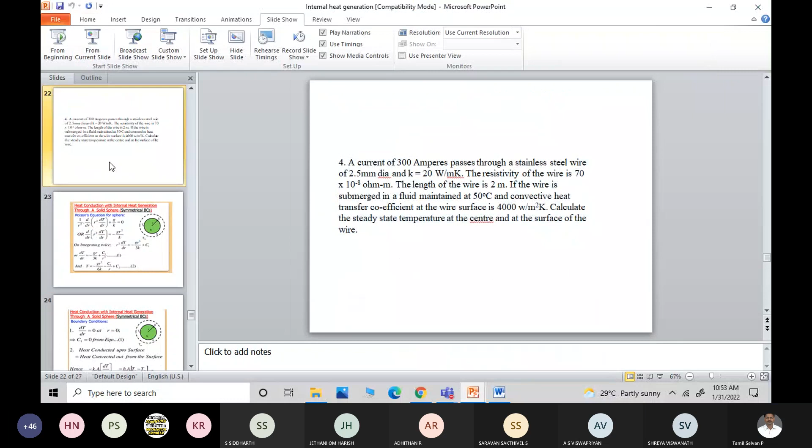Hello, am I audible? Yes, sir. Okay, up to what step did we do the problem on the previous day? Up to which step, man? What are the things we found out? Surface temperature, I think we have found out, am I correct? All of you are there or not? Sir, I guess we have to find T naught, sir. I guess we are yet to find T naught, sir.

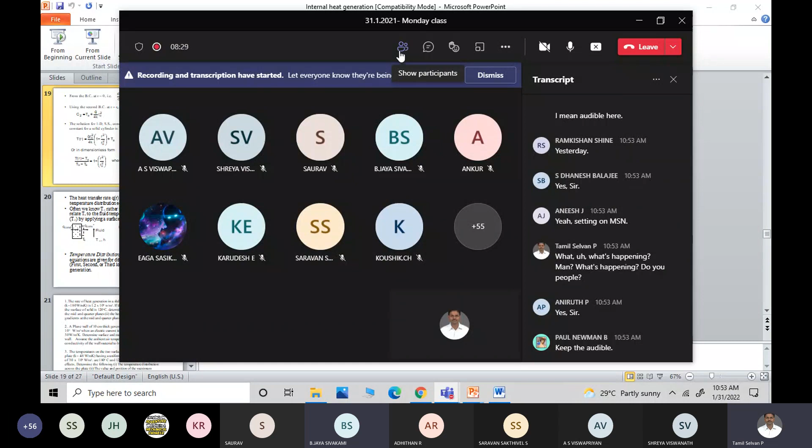Surface temperature, center temperature, right? Yes, sir, surface temperature, did we find out? Hello? Am I audible here? Yes, sir. What's happening, man? What's happening to you people? What's happening there? All of you are there or not? Kindly open your webcams, I want to see you, man.

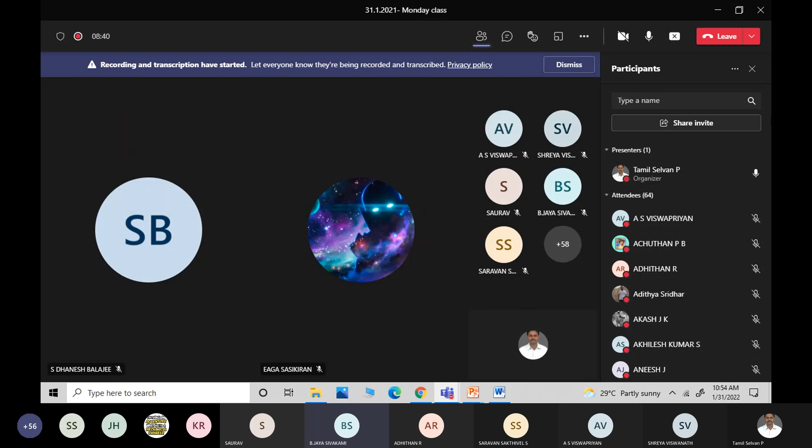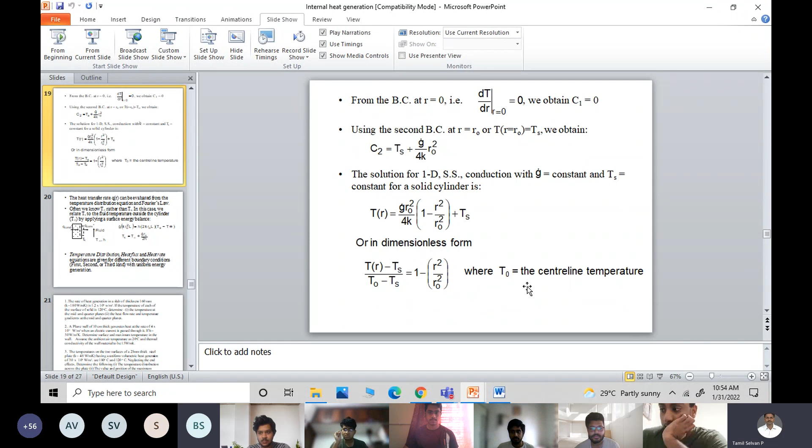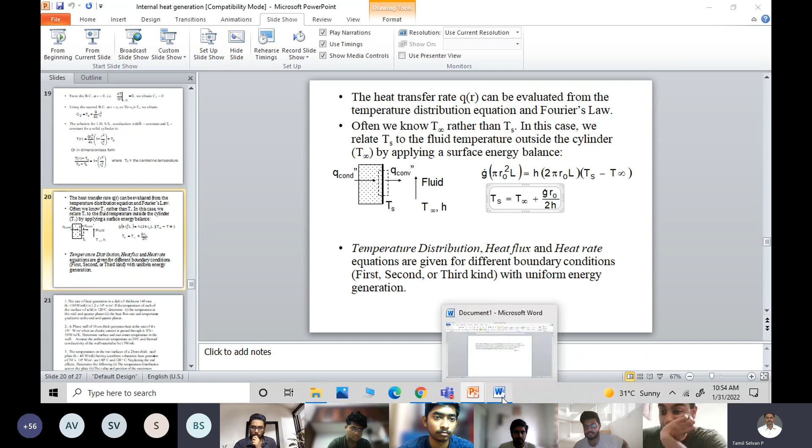See, it's ridiculous, only one step I asked you to do and you didn't do it. T naught is the center line temperature, the center temperature, which you are supposed to find out, right? You didn't do it. Surface temperature, have we found out? What is the value we got? Hey, all of you have got the problem with you or not? Sir, wasn't it 63.33 the surface temperature? We found it on the previous day, right?

Yeah, you can close your webcams. We have found the surface temperature on the previous day, right? Yes, sir, wasn't it 63.33? Okay, then why are you people struggling? Did you have a notebook with you or not? Calculators, notebook.

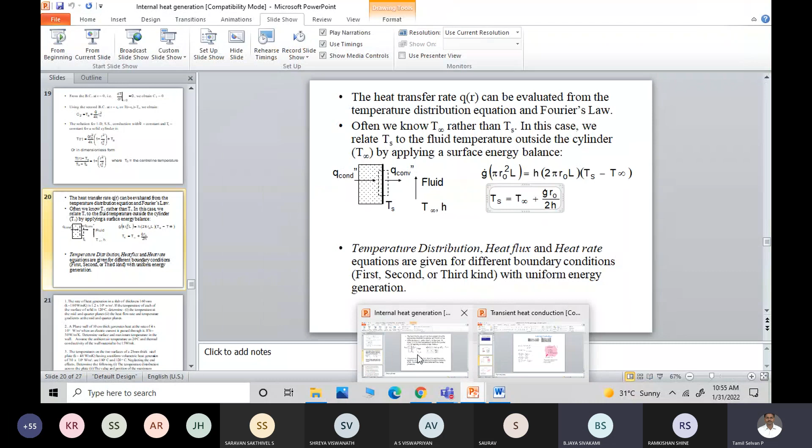Now you are expected to find out the center temperature, right? So how to get the center temperature? I have already told you, you can use this expression to get the center temperature. Now we know that at r equal to 0, dT by dr at r equal to 0 equals 0. So what happens here is the temperature at the center, T naught, the center line temperature. We can use this expression to get T naught, or we can use the general expression. Central line temperature.

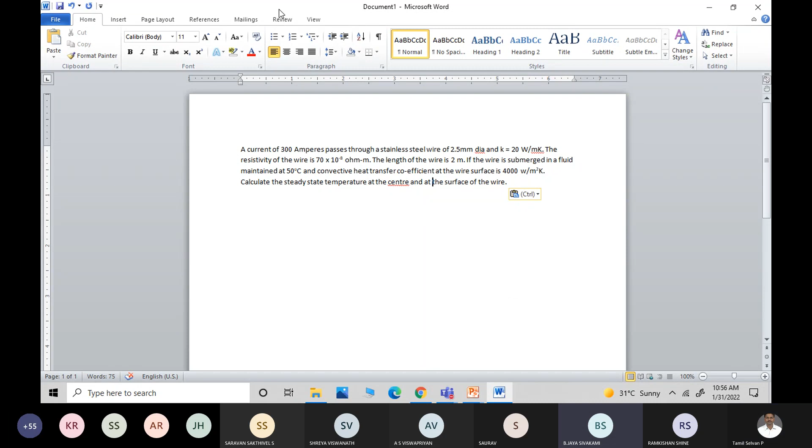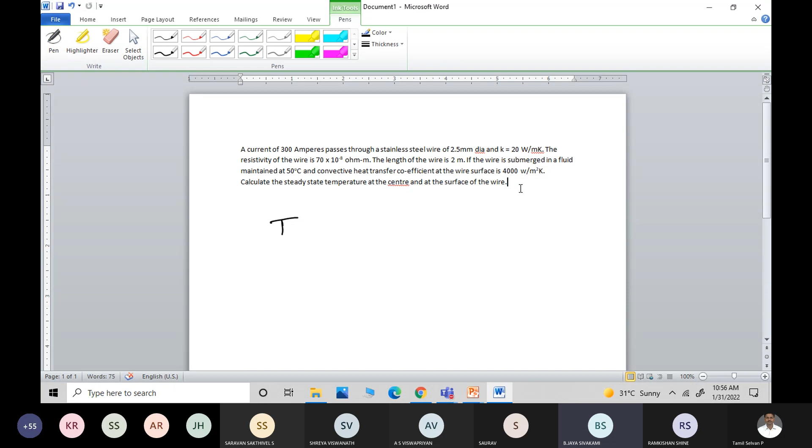Is it visible to you? Yes, sir. So this is the expression. Is it visible? Yes, sir. Now, since R is equal to 0, this term becomes 0.

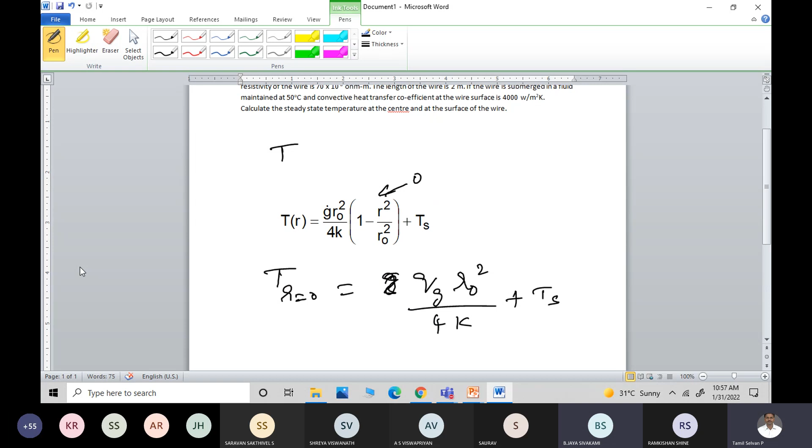So what happens here is temperature at R equal to 0 is QG times R naught square, divided by 4K, plus surface temperature. R naught is the outer radius. So the QG value, the internal heat generated value, what value did we get for QG on the previous day? 2.6 into 10 to the power 9 watts.

And the outer radius, what is the outer radius? The outer radius is from the diameter of the wire given, radius 2.5 mm diameter, so the radius is 1.25 mm. So now substitute: T naught equals 2.6 into 10 power 9 divided by, into R naught square, 1.25 mm.

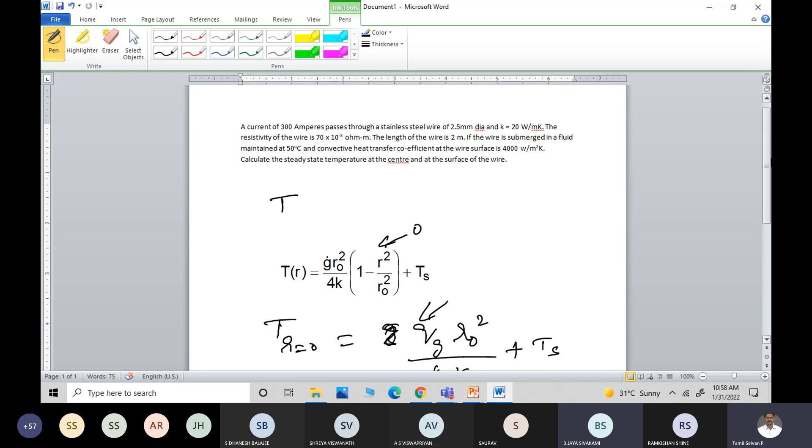All of you are listening or not? Yes, sir. Students, do you find any difficulty in substituting the values and getting the result? Any problem for you? Why did none of you do it? Why do you want me to do all the problems? If this being the case, you will not be able to get good marks in the CAT exam as well as the FAT exam, please understand that.

And what is the surface temperature value? 63.33, sir. Okay, now what is the central line temperature?

What is the value, pa? I'm getting 114.08. Yes, sir, that's what I'm getting. Others, please check. Sir, I got 114.11. Same, sir, same.

What is the wall temperature you got? All of you, surface temperature? Sir, surface temperature is 456.25, sir.

Not 63, I guess. What are you doing? Sorry sir, confused with the previous problem. Someone said it wrong, sir. Surface temperature is 456.25, sir.

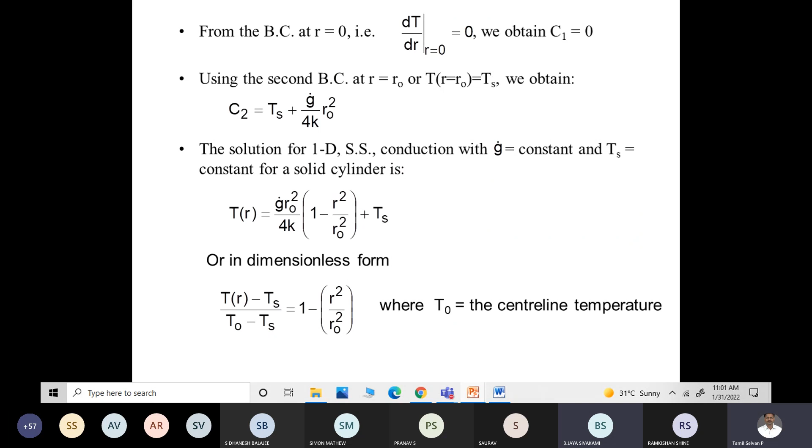So this is something about the cylinders. In the previous cases, we have solved problems with composite wall, cylinder, and sphere, right? Similarly here we solved problems with slab generation - internal heat generation in a slab, internal heat generation in a cylinder, and finally internal heat generation in a sphere.

The outer radius is given by capital R, and smaller r is nothing but radius at any point, from R equal to 0 to R equal to capital R. Is it fine, students? Is it visible? Yes sir, yes sir, yes sir.

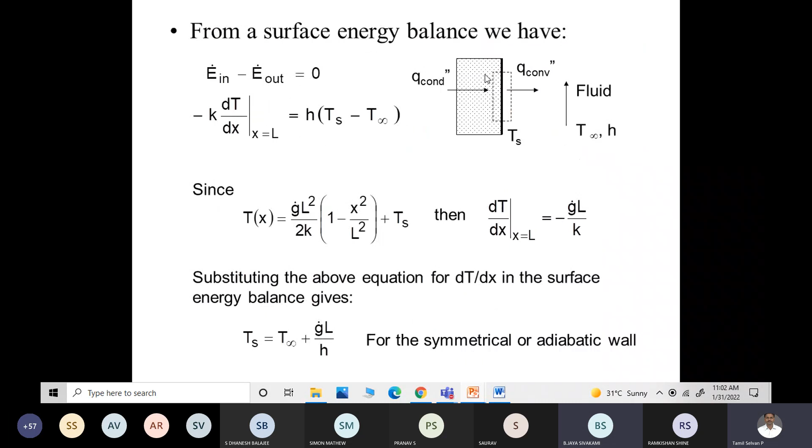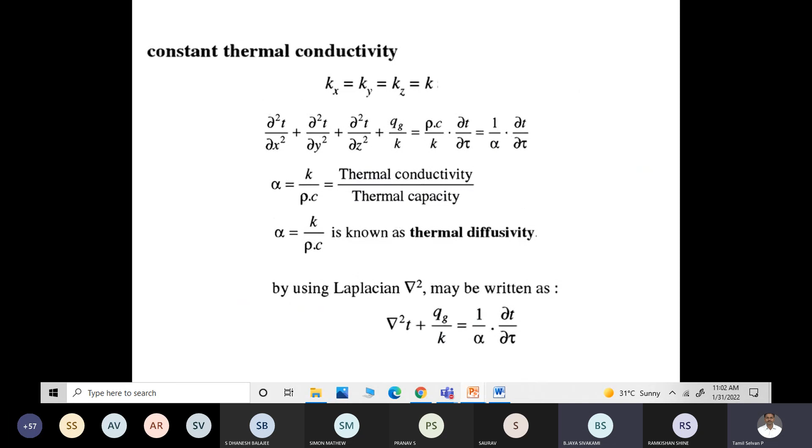And the Poisson equation - we know that the Poisson equation for sphere, right? You may ask, sir, how come you got all these equations, earlier you didn't do it. So this is the equation. For Cartesian coordinates, we got this, right? Am I correct? Dou square T by dou x square.

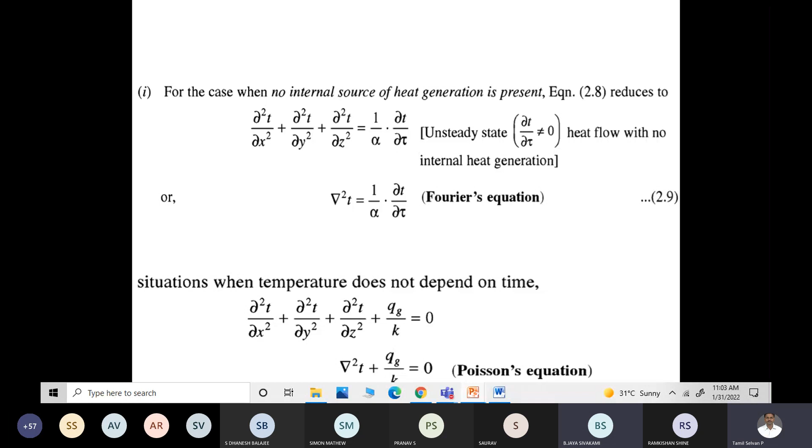And how it becomes Fourier equation, how it becomes Poisson equation, and how it becomes Laplace equation - everything you know, right? If there is no internal heat generation, the equation becomes Fourier equation. If there is internal heat generation and steady state, it becomes Poisson equation. And if there is no internal heat generation and steady state, the equation becomes Laplace equation. Am I correct or not? Yes, sir, yes sir.

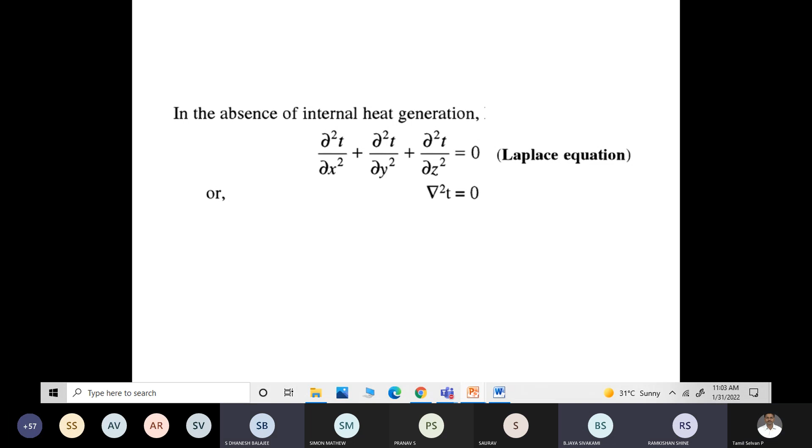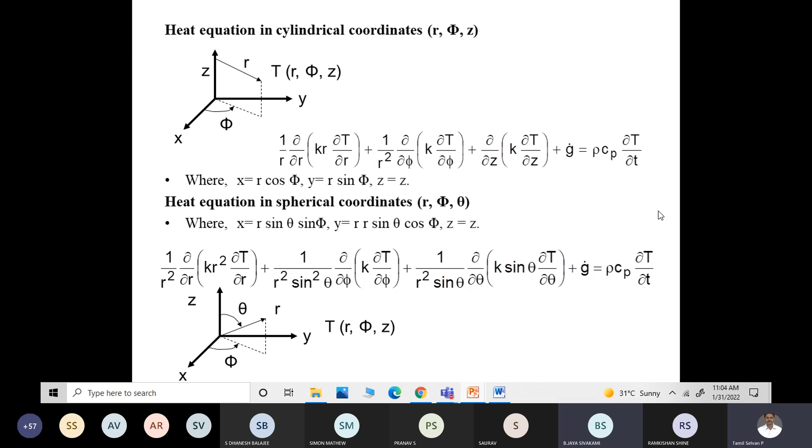For cylindrical coordinates. Similarly, for spherical coordinates, 1 by r square dou by dou r kr square dou t by dou r - we neglect the y-axis, z-axis, and steady state. When you neglect all these things, we get this expression. So for radial systems also, I told you this equation.

From this equation, is it visible at the top? This equation is visible, yes sir. So, when we have steady state and when we consider only the x-axis, we will be having this expression.

Similarly, for sphere, when we consider only the x-axis and neglect y-axis and z-axis, assuming steady state with internal heat generation, we get this expression. When we rewrite this, minus g by k goes to the other side and this r squared goes to the other side. So the expression becomes d by dr into r square dou t by dou r or dt by dr, which is equal to minus gr squared by k.

When we integrate this, r square dt by dr, which is equal to minus gr cube by 3k. We know that when we integrate r square, r power 3 divided by 3. Am I correct, when we integrate r square? Yes sir, because you people are more experts than me, especially in mathematics.

So r square, when we integrate, it becomes r cube by 3. Am I correct? Yes, sir.

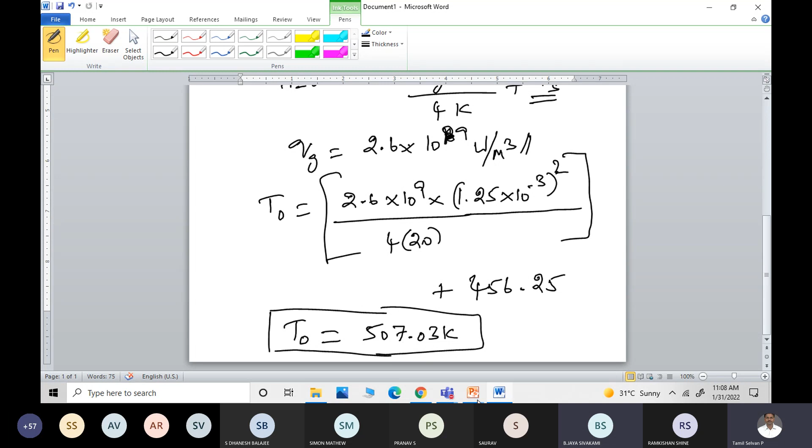See, units are very, very important, students, because finally, when you do the problem, you will be getting wrong answers. Okay, Q suffix G will be in watt per meter cube, whereas Q will be in watts, and heat flux will be in watt per meter squared. Please understand, Q suffix G, internal heat generated, will always be in watt per meter cube.

So to find out the temperature, we will be having this expression: T equal to G, where G is nothing but QG, expressed in watt per meter cube, divided by 6k, into R squared minus r squared, where capital R is nothing but the outer radius and small r is nothing but the radius at any point from the center, plus gr by 3h plus t infinity.

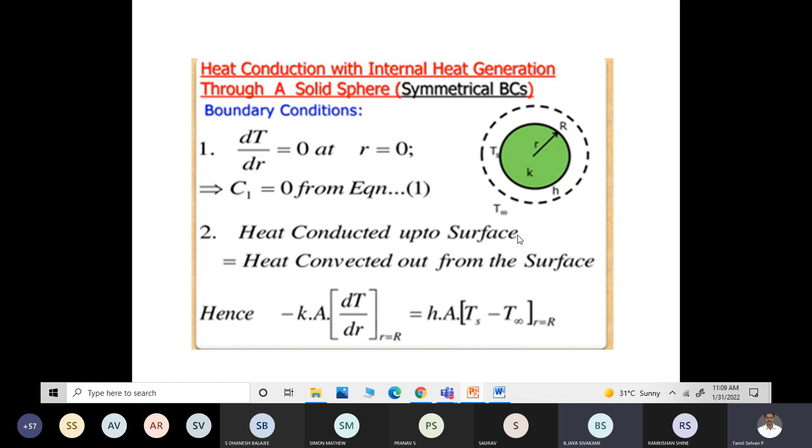Now what happens here is, from this expression you can see dt by dr, which is equal to 0 at r equal to 0. So what happens is C1 is equal to 0, and by energy balance, heat conducted up to the surface is equal to heat convected out. So from that we have got C2, and after substituting C1 and C2, we are getting this expression. This is the final expression to find out the temperature.

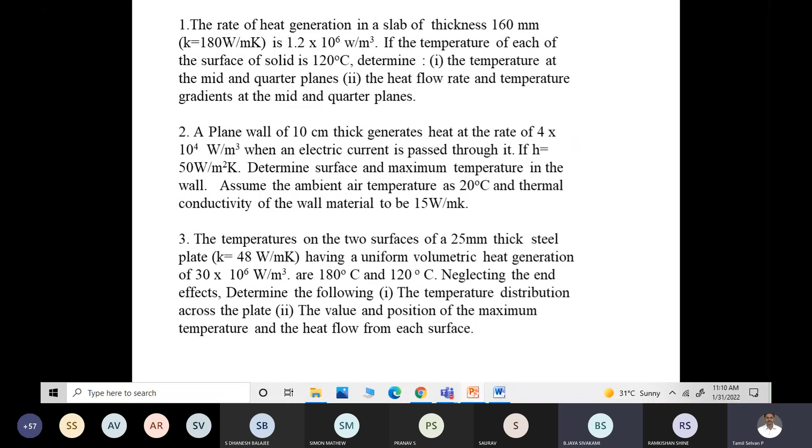Okay, so please understand, students. And you may ask me a question: sir, what are the examples for this?

An atom bomb or a small bomb which is in the form of a sphere can be taken as an example. Or in some cases, even the practical case, you can assume the apples, the oranges, the ripening of apple, ripening of oranges - there will be some internal heat generation in it when it is exposed to the hot sun. There will be some internal heat generation.

So the ripening effect takes place, and those apples can be assumed as a sphere. We can find out the surface temperature and the internal temperature. Similarly, nuclear reactor fuel rods have small shells in the form of a sphere, which can also be taken as a sphere, and we will be having internal heat generation in that too.

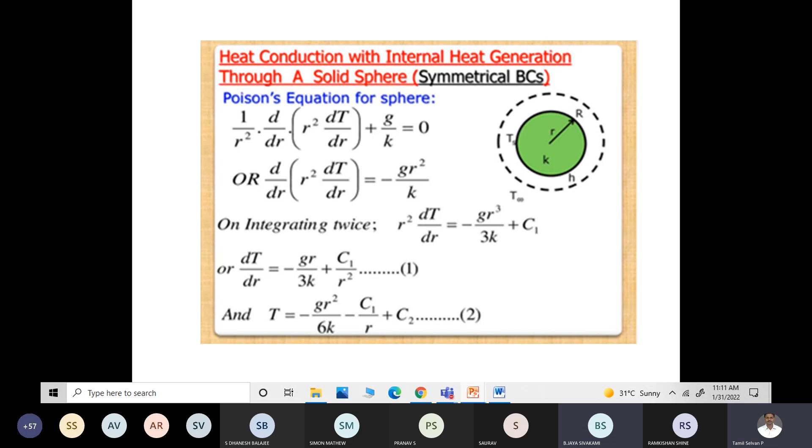When we talk about examples, even in Cengel's book, they have mentioned some examples. Can you solve this, or do you want me to? Because after solving this, I will be moving on to the introduction to module 3, that is transient heat conduction.

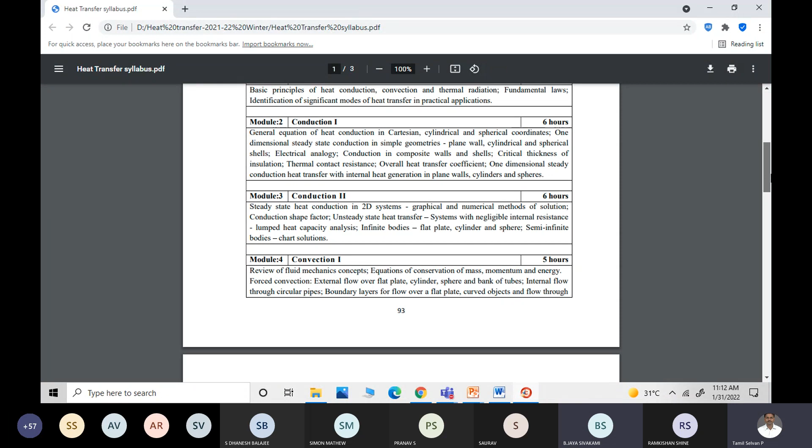Actually, in module 2, we have this syllabus. For CAT, you will be having module 1, module 2 complete, and module 3 whatever I cover up to next Friday. In module 1, we have the general concept of conduction, convection, and radiation, with small problems and significant applications of heat transfer. In module 2, we discussed overall heat transfer coefficient, internal heat generation in wall, cylinder, and sphere, composite wall, composite shell, and critical radius of insulation.

Everything I have covered. In module 3, we have unsteady state conduction, unsteady state heat transfer, which is the major thing we have to study. Then we have steady state heat conduction in 2D systems, especially involving graphical and numerical methods. After discussing unsteady state, we will solve steady state 2D systems. That is the order I will go.

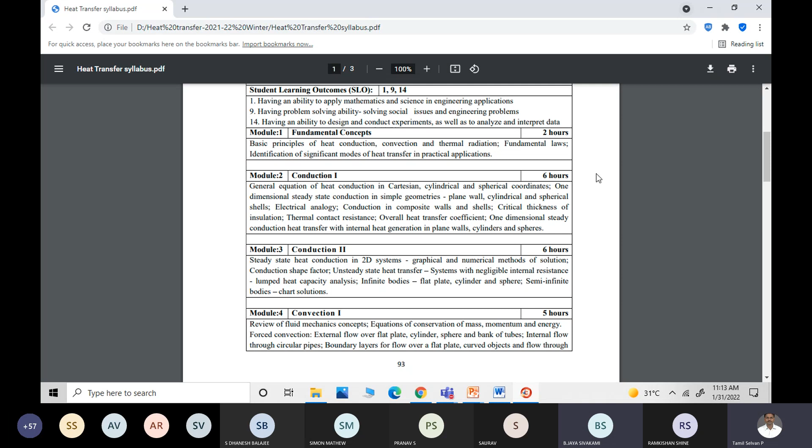Because after discussing one-dimensional heat conduction in composite wall, cylinder, and internal heat generation in one-dimensional cases, if I go to two-dimensional, then it will not be easier to understand. So I will move on to one-dimensional unsteady state heat transfer first. After completing module 3 topics, I will move on to steady state heat conduction in 2D. This is the order in which I will be going. Is it fine, students?

Is it fine? Yes, sir. Okay, can you solve this sphere problem?

Heat is generated in a solid sphere of 10 centimeter diameter at the rate of 600 watt per meter cube, so Q suffix G is given. The radius is given as 5 centimeter. Surface heat transfer coefficient is 10 watt per meter squared Kelvin, that is the H value. K value is given as 0.2. T infinity is given as 30 degrees C. You are asked to find out the maximum temperature and surface temperature.

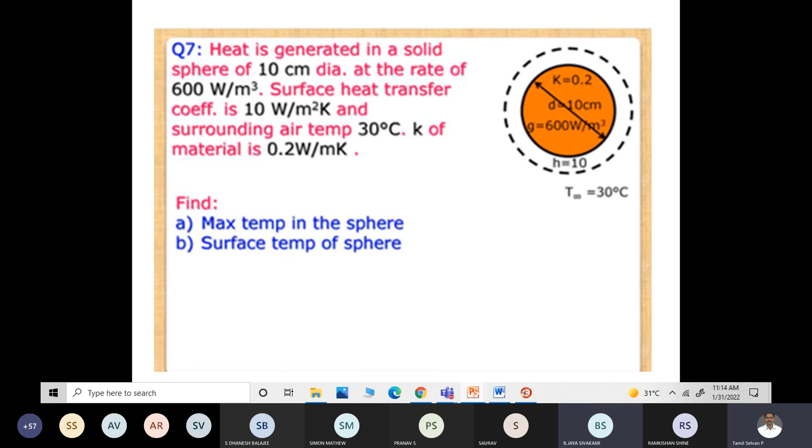All of you are able to do this, or you want me to do it? So can you do it, sir? Yeah sir, we can do it. Okay, no issues, let me solve it in 1 or 2 minutes, please wait.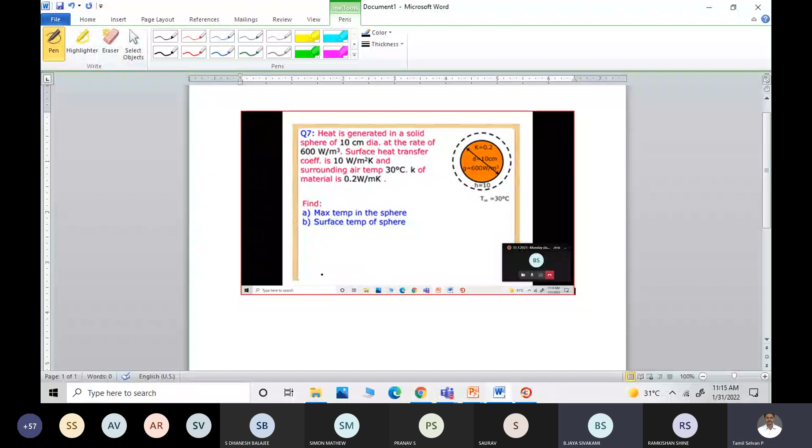So here, given data. See, the very first important thing is you have to write the data. Is it visible to all of you? The question is visible? Yes sir, I have copied and pasted. Okay, the given data: please write the maximum radius R is 5 into 10 power minus 2 meters.

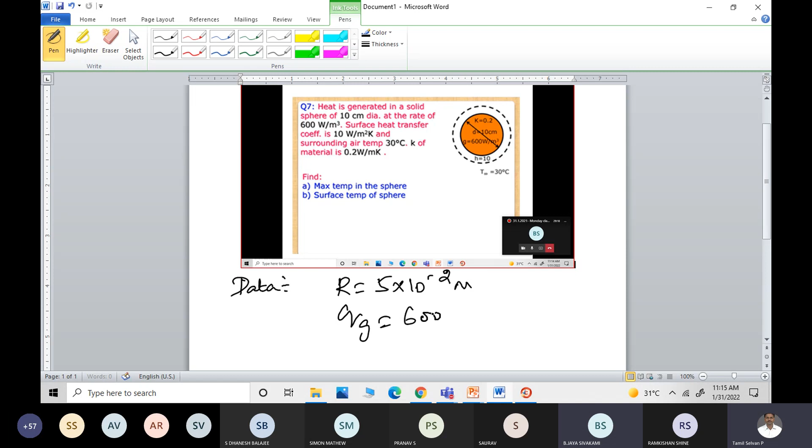So the diameter is given as 10 centimeter here. Similarly, Q suffix G is 600 watt per meter cube, H value is given 10 watt per meter squared Kelvin, and K value is 0.2 watt per meter Kelvin. T infinity is given as 30 degrees C, am I correct? Any other data given?

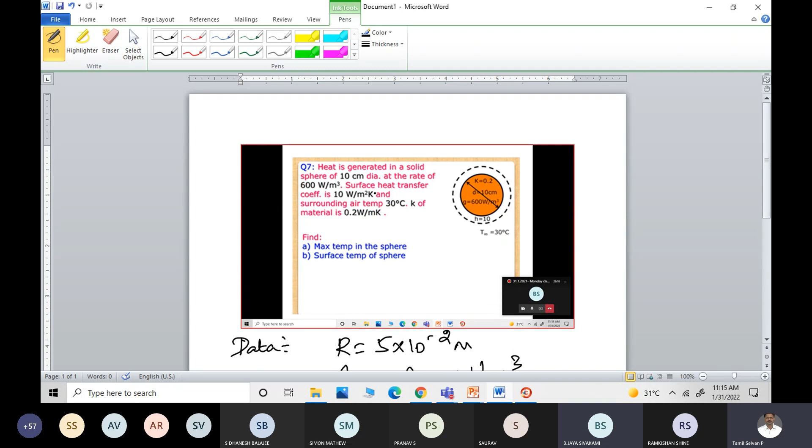Now you are asked to find out the maximum temperature and surface temperature. We know that the surface temperature Ts will be at r equal to the radius. So the surface temperature will be equal to, so the first term will become 0. Am I correct or not?

Yes sir. You will be having gR by 3h plus T infinity. So that will be the expression. Let me check it out.

Sir, one second, can we show the problem? You solved it, huh? No sir, no sir, I want to see the question. Yeah, let me write the expression.

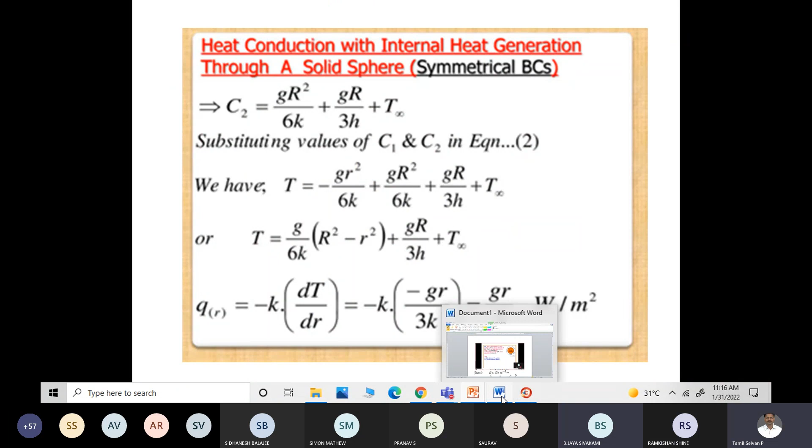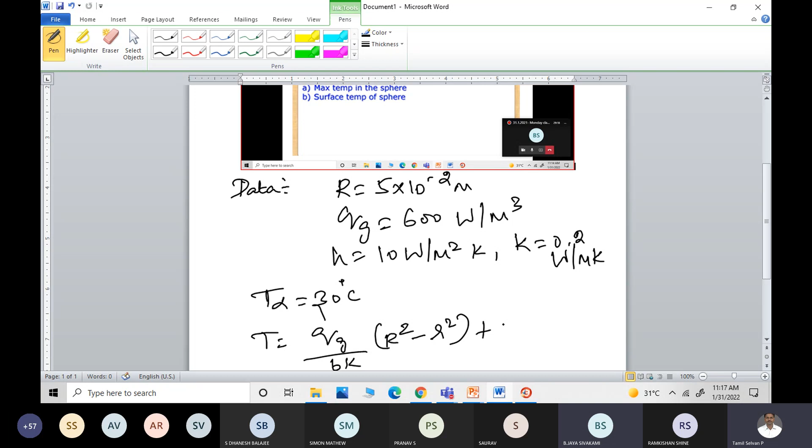T equal to g by 6k into r square minus r squared, plus gR by 3h plus T infinity.

At surface temperature, you are asked to find out two things: the maximum temperature and the surface temperature.

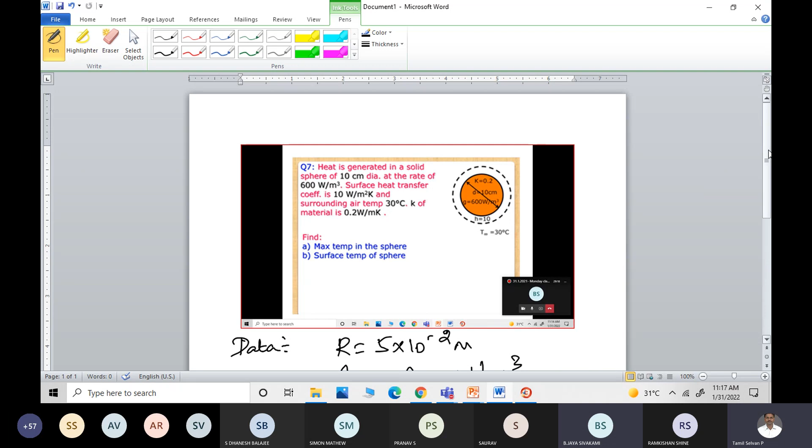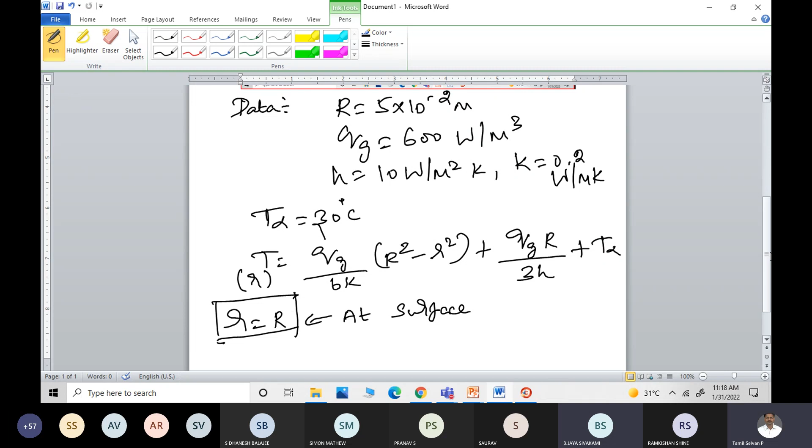At surface temperature we know that small r equals capital R. This expression is for temperature at any point r. At surface, capital R equals small r, so the first term goes out. So T equals Qg divided by 6k into r square minus r squared.

So this becomes 0. Finally we will be having only these two things remaining, so this term becomes 0.

When you substitute the values, 600 into outer radius, 5 into 10 power minus 2, divided by 3h, 3 into 10, plus T infinity. The surrounding fluid temperature is 30 degrees Celsius. So that is the first answer.

Surface temperature, T surface. I use this equation. This term becomes 0, only this term will remain. So it comes to 31 degrees Celsius.

Now find out the other thing: maximum temperature. The maximum temperature will be at the center, so this term is 0 at r equal to 0. Then you will be having the expression Qg R squared by 6k plus Qg R by 3h plus T infinity. You have to use the same equation, only the small r becomes 0 and you substitute capital R, which is 5 into 10 power minus 2 meters.

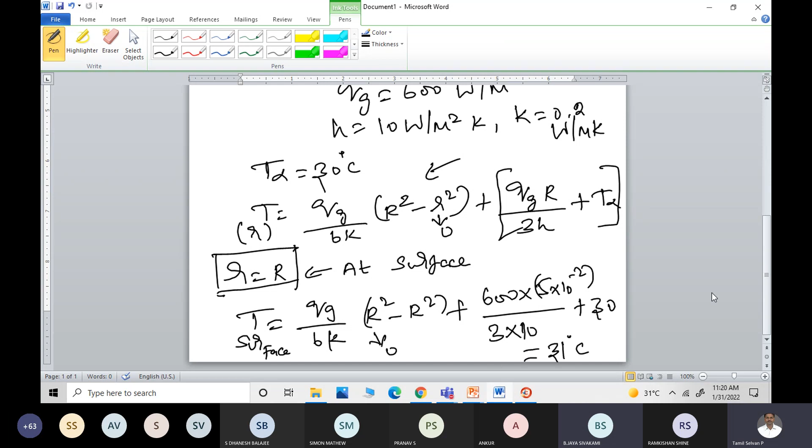Is it fine? Whether you can do it? So the answer is 32.5, is it correct? Maximum temperature, I think I have given it in the slides also.

So for sphere, this is the expression: temperature at any point R is Qg by 6k. Generally they used to use G, but I use Q suffix G because G alone can be slightly confusing. In some textbooks they use G, in some they use Q suffix G. I generally use Q suffix G because heat is usually mentioned with capital Q or small q.

So the maximum temperature is 32.5 degrees C when you use this expression. And for surface temperature, small r equals capital R, so this first term becomes 0, and you will be having only GR by 3H plus T infinity. Is it fine, students?

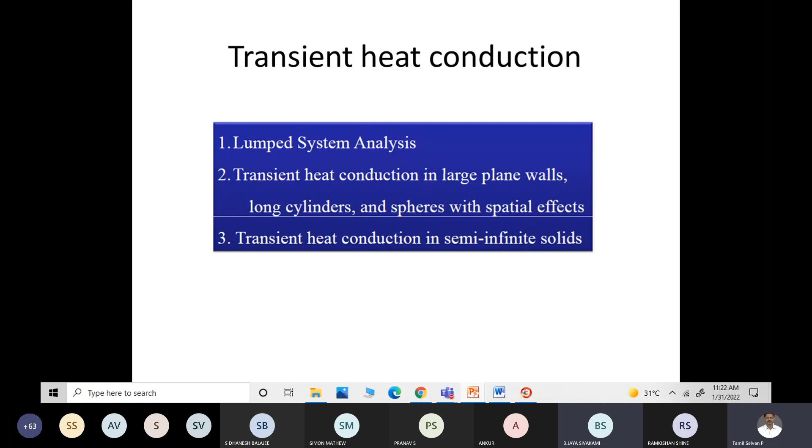Now, all the heat treatment processes we know were conducted mechanically to improve the strength of the material. Am I correct or not?

Okay, now what happens here is you have all the processes since see, food industry. I already told you it uses heat transfer technologies to the greatest extent. Okay, but you people, being mechanical engineers, you don't like that.

We have already studied this. In the very first topic, we have studied this. We have discussed this. Am I correct? Yes, sir. In composite systems, the very first slide talks about this. Try to remember, ma. Heat transfer is a very, very important subject. I don't know why you people are not studying it properly.

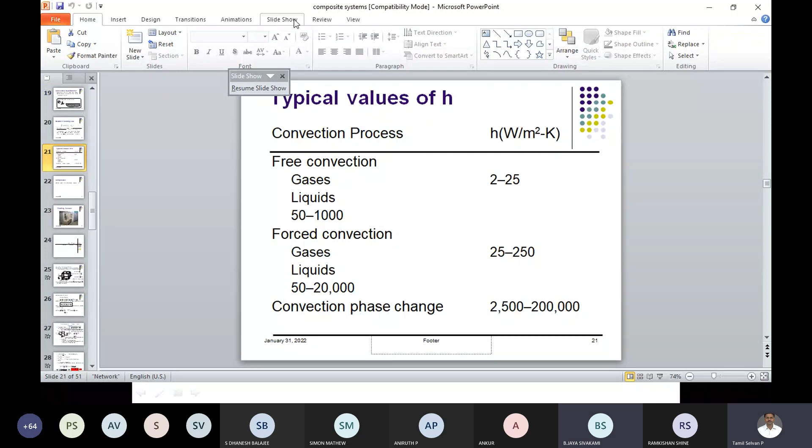This slide, is it visible to you? Yes, sir. See, look at the H value. H value for gases is 2 to 25. For liquid, 50 to 1000. And if it is forced convection, then it is 50 to 20,000. Am I correct? Is it correct?

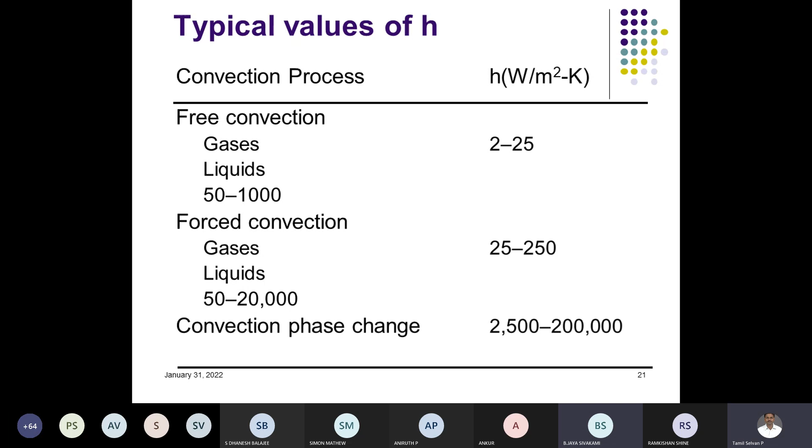Yes, sir. So that's where if you allow the hot solid to cool in still air, the convective transfer coefficient of air is lesser, whereas the convective transfer coefficient of the fluid is higher. So that's why when we go for heat treatment techniques, immediately we drop the hot solid into the liquid, which will be at a lesser temperature.

Cooling of hot metal forging: initially the hot metal will be at a temperature of 200 to 300, and the water will be at a temperature of around 30 degrees C. So what happens is you will be having the cooling of the hot solid to room temperature in a few minutes' time.

But still the outer surface may be cold while at the center there might be some hotness. So it's not compulsory that the whole solid attains the full room temperature, or the liquid temperature in this example. Am I correct or not? Yes, sir.

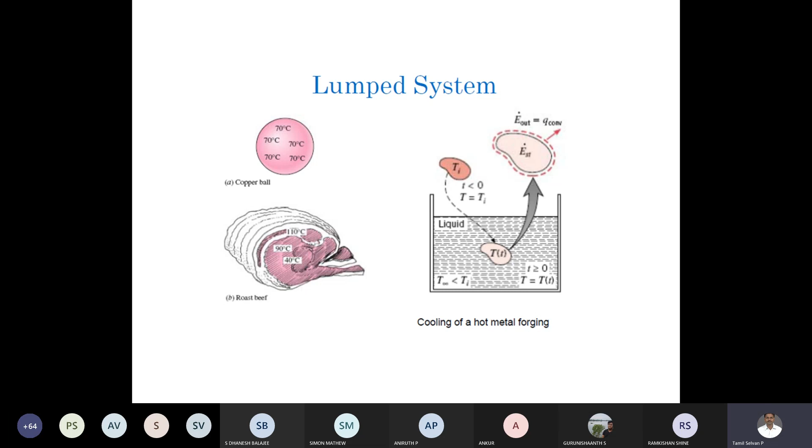Hello? Am I audible? Yes, sir. So why the name liquid metal cooled? Because the liquid sodium will be in liquid state even at very high temperatures, and it is capable of absorbing more heat energy. Okay, so that is one.

See, these are all some of the examples for unsteady state heat transfer. And now when we talk about unsteady state heat transfer, we know that the heat energy which is convected from the solid to the outside is equal to the increase in the energy of the body. So it may be increase in energy, or it may be decrease in energy, depending upon whether the process is heating process or cooling process.

Okay, and when we integrate it, we will be getting this expression: the temperature at any point at any time t minus the surrounding temperature divided by Ti minus T infinity. Ti is nothing but the initial temperature, M is nothing but the mass of the body, V is the volume of the body, and rho is the density of the body.

So now the heat transferred from the solid, heat convected to the liquid, is equal - by means of energy balance, they assume it as equal. Using that, they have this expression: H times A times del T, which is equal to mcp dt. You may ask, sir, how come the small dt has come? See, actually it is Ha into (T infinity minus T), which is equal to mcp dT divided by small dt. So this dt has gone to the other side - don't get confused.

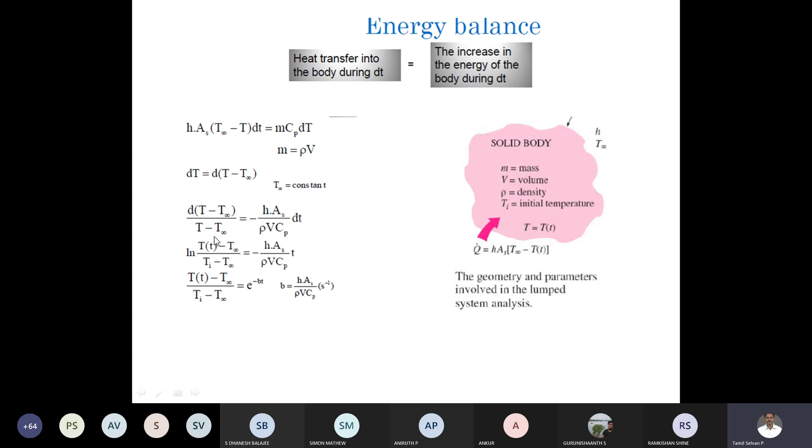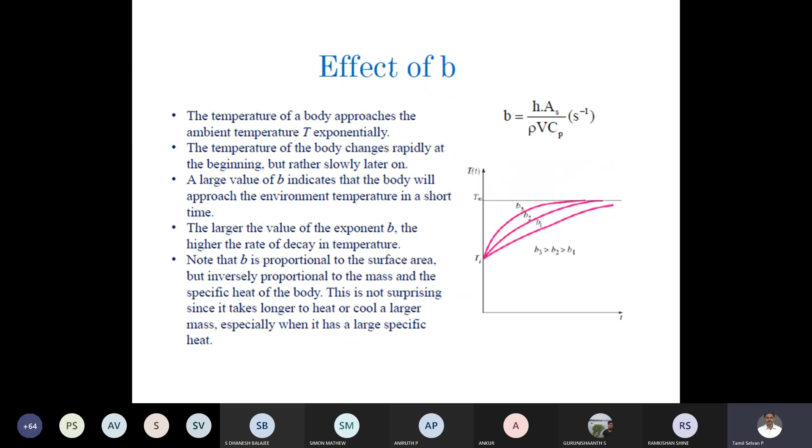The heat convected is equal to the increase in the energy of the body during a small time dt - small t stands for time and capital T stands for temperature. You will be getting this expression since T infinity is a constant. Anyway, I will discuss this tomorrow also, and I will discuss the effect of this B value also. Let me stop the recording.